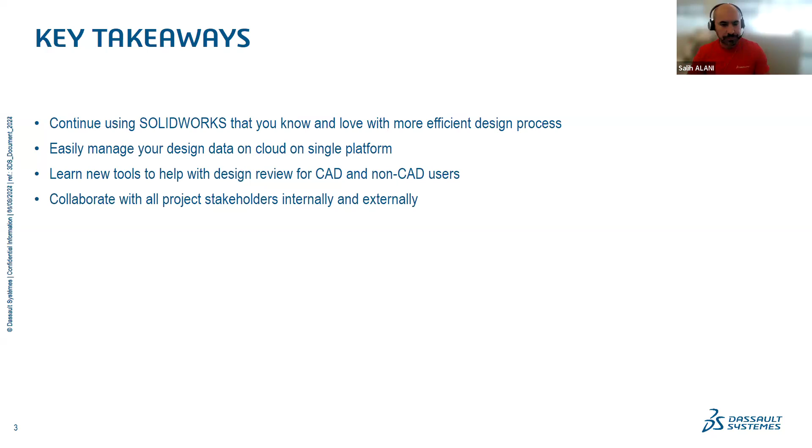So I would like to start with this: we all know design, we all know CAD. Most of you, whether in school or professionally, know SolidWorks and how to use it. But the main challenge with developing a product is not only the CAD itself. There are so many different things that cause challenges when you're working on a product design. The first thing, in my view and from the market surveys we get from people we work with, is the lack of collaboration on CAD design.

If I ask everyone here today, when you design a 3D model, the first thing you do is give it a very specific, meaningful name and put it on your desktop. Then when you're looking for it: did I put it in folder A, folder B? Did I put it on Google Drive? Is this the last version? Did I create a new one? This causes a lot of confusion when you collaborate with people and designers. You're always looking for something and you don't even remember where you put it.

So lack of collaboration is always going to be a big hurdle for every engineer. Of course, there are many different tools today, and the platform tries to give you a one-stop shop and a single source of truth for everything you need to do as a company, whether you're a designer, in marketing, or in a different department in the organization.

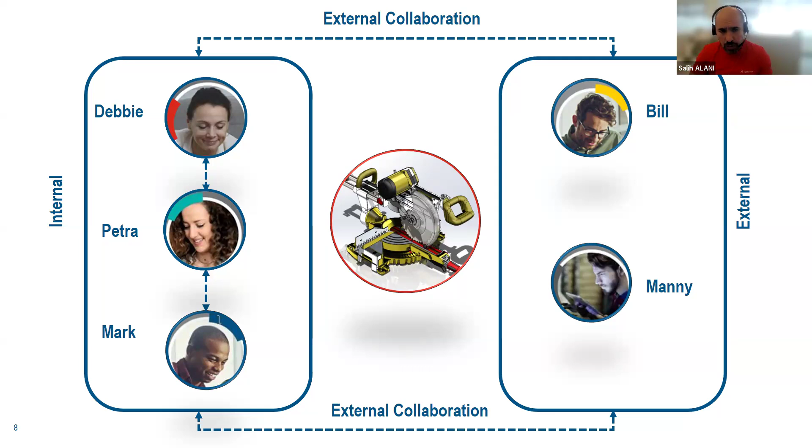So first things first, when it comes to 3D Experience SolidWorks, the beauty of it is the simplified or quick onboarding. Today, if I'm the admin of the company, all I need to do, I know that Debbie is a designer here, I can assign the 3D Experience SolidWorks role. Then she can install it directly from the platform, and she can start working.

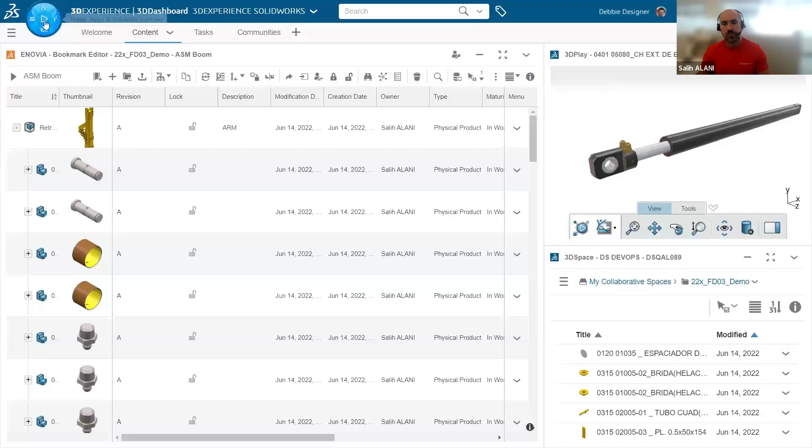In addition to that, from the platform, you have access to all the basic information, like learning how to use the platform and how to use SolidWorks. And you can also ask questions directly from there by using the communities. So this is a quick example. Debbie, for example, goes to the Compass. She can access what we call the Welcome app, which gives you everything in there. By simply opening the Welcome app, you will see the entire information.

You have the Learning Center. You have a quick welcome tour that you can navigate through to understand what the platform is and most of the things you need to do in order to start your work. After that, you can just simply click on install, and that installs SolidWorks directly on your machine. It's a very simple installation. If you guys have run the install before on desktop, when you use this one you will see how simplified this experience is today.

So once SolidWorks is installed, you can just simply click on the open button, and you will open the SolidWorks session. One thing I would like to note, you can open it from the platform, but at the same time, there will be a shortcut on your desktop where you can actually run 3D Experience SolidWorks or the SolidWorks connected application on your machine. So first, I explained here how you start by installing the product.

Now, the next step is, now you have SolidWorks, you need to start saving your data. Today, in the majority of workflows, you save your stuff locally. But when you save stuff locally, it's not available for everyone in your organization. With the platform, you can start working on your design. You can have everything locally, but as soon as you're ready, you can push and save your data to the cloud so everyone will be able to access it. So inside SolidWorks, on the left-hand side, there is something called the FeatureManager Design Tree, which I think most of you are familiar with.

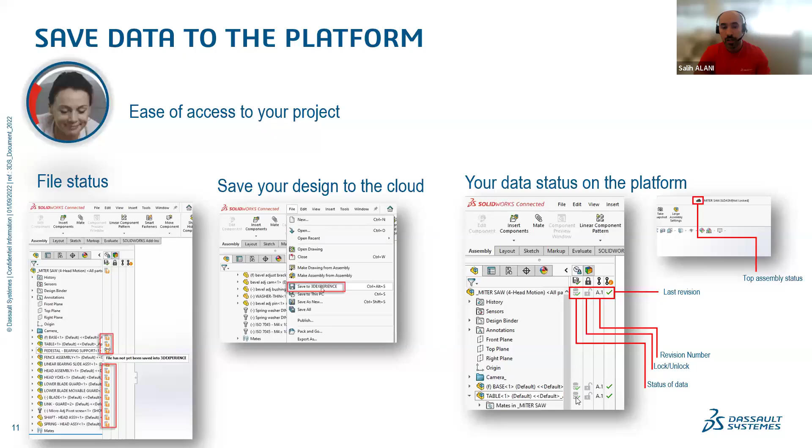I have my project locally today on my machine. I can open SolidWorks. As soon as SolidWorks opens, I can start using SolidWorks exactly the same way I use it today, the familiar way. I can see from that window, as I showed, the status of the file. You can see here, everything is not saved yet to the 3D Experience platform. Everything is still local to my machine. I have something called My Session, and we're going to be using this a lot. My Session is the panel where you can see the status of your content on the platform.

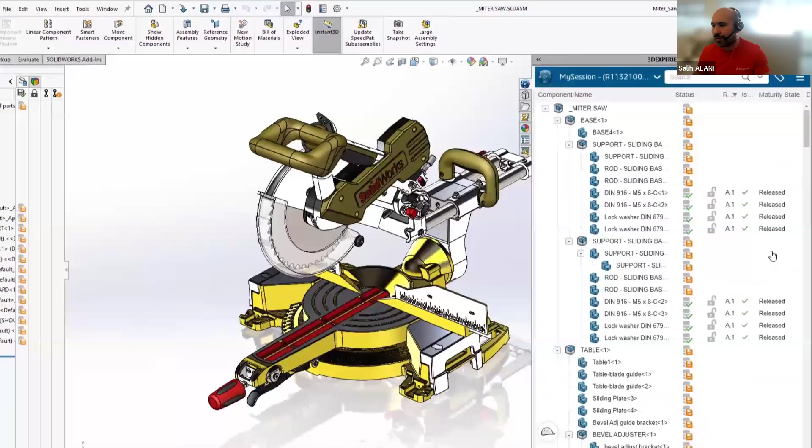And a Toolbox component is always going to be released, because a Toolbox component is usually something that you do not modify. It's available for you to use in your product. Now I understand what is going on with the model. This is the starting point. Now I can start making some changes to the design before I save it to the platform.

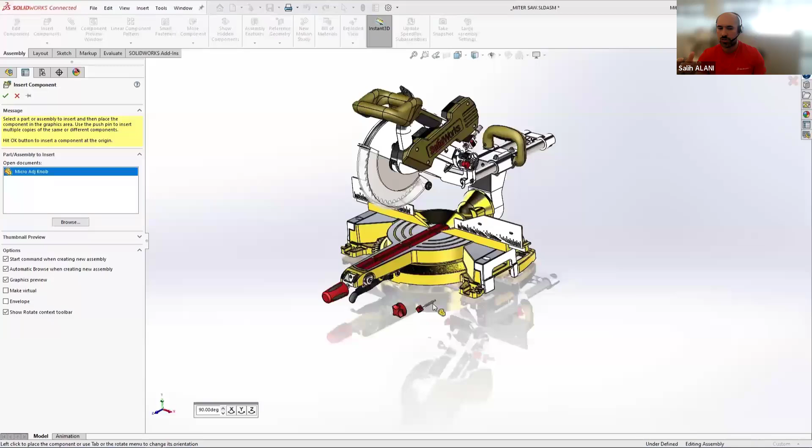So in this case, there are some missing components or parts in my design. There is the knob of the miter saw, and there is also the pin. So a few simple operations here, just doing some mate operations in this workflow to complete my design. And after my design is complete and ready to go, I can go ahead and push my design to the 3D Experience platform.

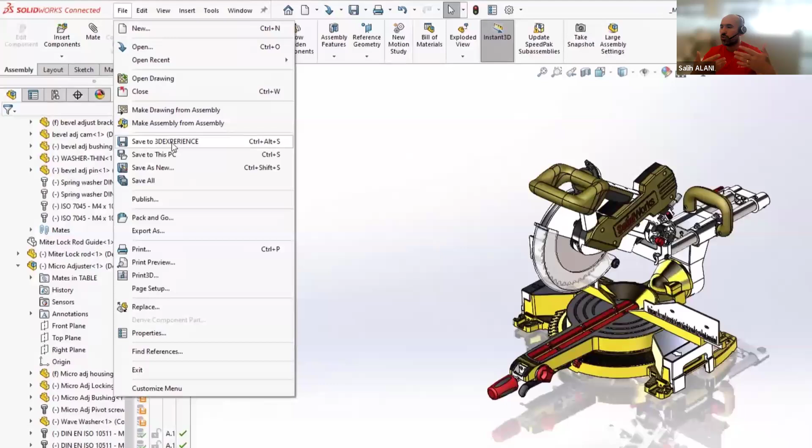Why? So I can first make it available on the cloud and also make it available for everyone. So you can see here, I can click on save to the 3D Experience platform. Once that's completed, your data is available on the cloud so everyone else can start using it. Once it's saved, you can see on the left-hand side, it went from the orange floppy disk icon to green, because right now my data is synced to the platform and everyone can access it.

After that, Debbie the designer, let's say, started uploading everything to the platform. Now, if there is some modification, how does it start? It starts with a task from your design lead. So let's say in this case, Petra is the design lead. She started by doing task assignments to the design engineers.

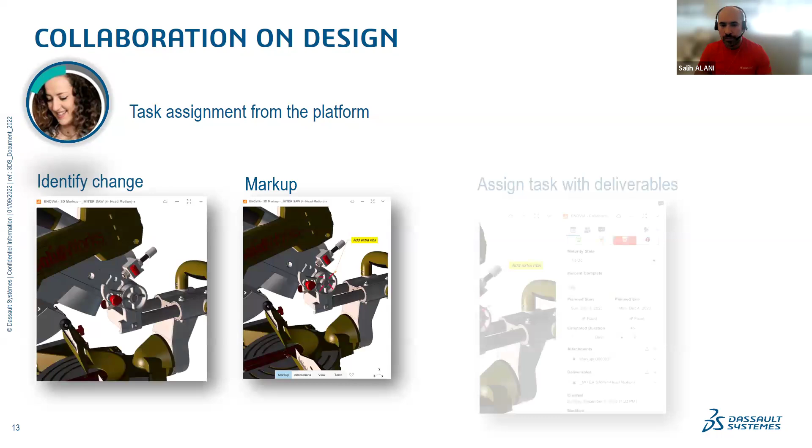From the platform, she can identify and inspect the model first and see what exactly is going on with it. She can start doing some markup to mark the area where the changes are needed. And she can start opening a task and then edit and provide that task to the designer so they can start their work.

So let's say Petra, the manager, is on the road today. She has no access to SolidWorks, but guess what? That's the beauty of the platform. She has access to a tablet. She doesn't need to do any specific design, but she can lead the people and give assignments to them. She can open the model because it's on the cloud, and she can use the tool called 3D Markup.

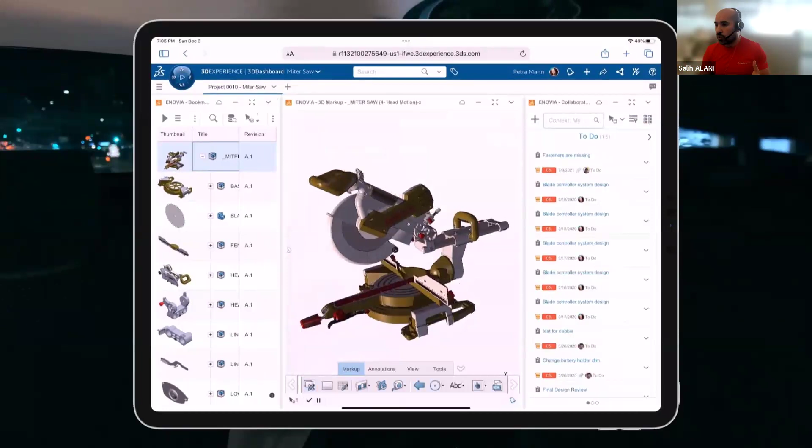In 3D Markup, she can start adding all the necessary modifications or changes to the product. She highlighted that extra ribs need to be added on that component to strengthen this area. So here she explained that extra ribs need to be added, and then she can start a task. A task is an assignment to the engineer to explain what needs to be done. She can assign the user, and then she can add the markup she created in here.

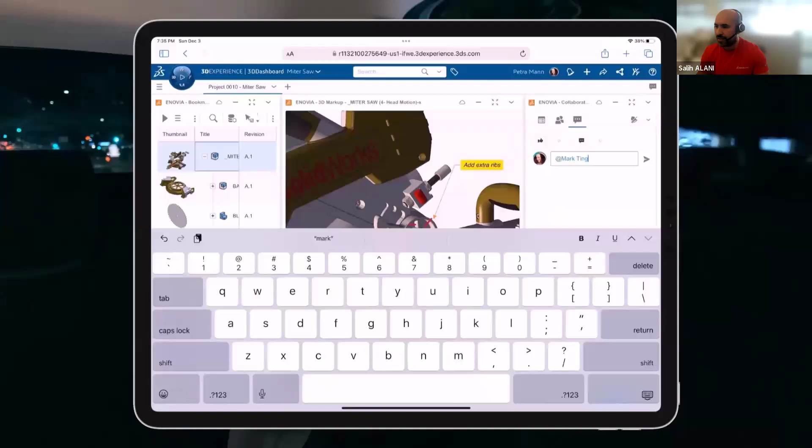And here's the other beauty. In addition to that, she can bring the design into the task. So the user, you will see in the next step, doesn't need to go and look for anything locally. He's going to go from the task and bring the design back to his SolidWorks application to continue the work. So now Petra did this and assigned the task. Now the other user will be able to see a notification and start the work.

One thing I would like to mention here: although I specifically said 3D Experience SolidWorks is available on the cloud, it's also available in offline mode. Today on desktop, you can use SolidWorks whether you are online or offline. But 3D Experience SolidWorks, since it's connected to the platform, runs with the internet. But we also gave the ability, if there is no internet and you know you're going to travel, like today you came to Alexandria for the user group, and while you're traveling you need to work offline, to take the license offline and continue working offline.

So what do you do first? Before you take the license offline, if you're going to do some work on the design, you need to lock the component or the file you're going to be working on so no one else can touch it. Because if you keep it unlocked, someone can modify it. You need to make sure the file is locked to you so no one else can change it.

And that's another important piece of information I would like to mention. When you work in a local or file-based system, and you both work on the same file, you're going to overwrite each other's work because you have no ability to lock it. Now here on the platform, you can lock it and continue working. If someone else wants to use the same component, they cannot modify it, but they can create a different version or revision to continue working on.

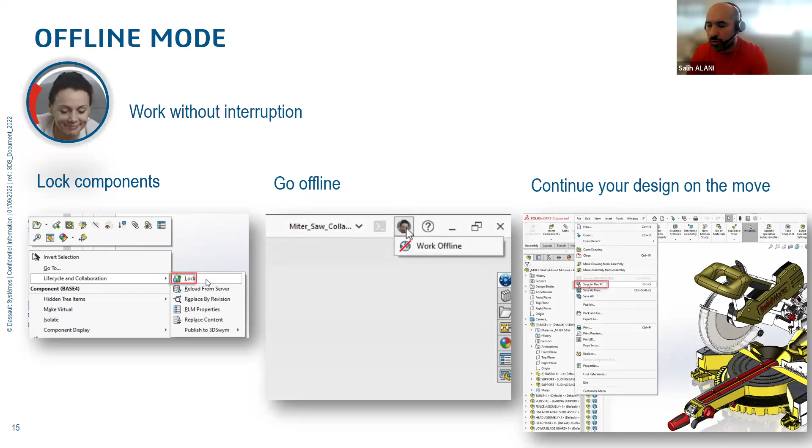So you lock the component first, and then you take the license offline. As soon as you take the license offline, you can continue working and saving your information locally. And once you get back online, you will be able to sync your changes to the 3D Experience platform.

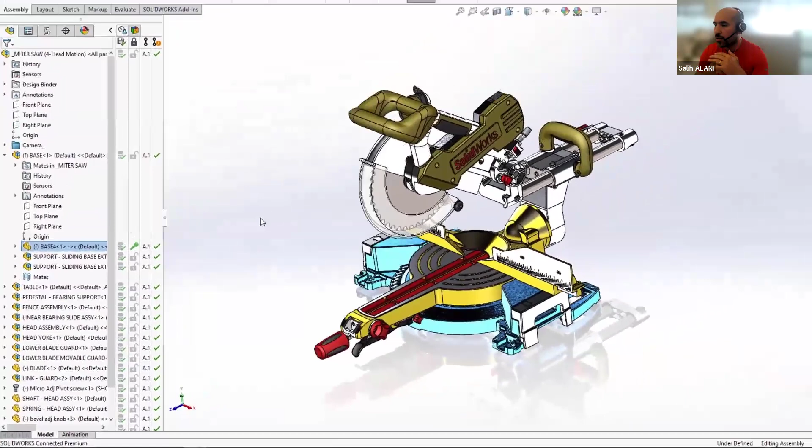So Debbie, at this point, she knows she's going to go on a trip. And before she goes on a trip, she knows that she's going to be working on that specific component in the design. What she does first, she goes and locks the file so no one else can access it and make changes. And you can see here in the tree, it gives you like that key symbol. That means it's locked for her own use.

After that's done, she got all the information that she needs. She locked it. She can go and take the license offline. Right now, to take the license offline, you have from 1 to 30 days maximum. In this case, Debbie knows that she's going to go for 15 days, so she takes it for about 2 weeks.

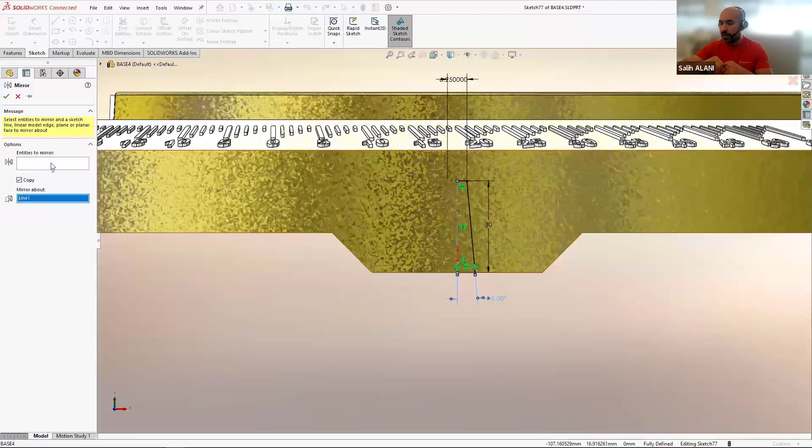In this case, if you remember what she did, she locked that component. And now she's going to make some edits to that base, and she's going to change the number of stops, because this is a miter saw that actually turns left and turns like 360 degrees, and she can modify how many stops you can add to this base. Simple operation, cut here, and she can pattern that, and now her work is basically done.

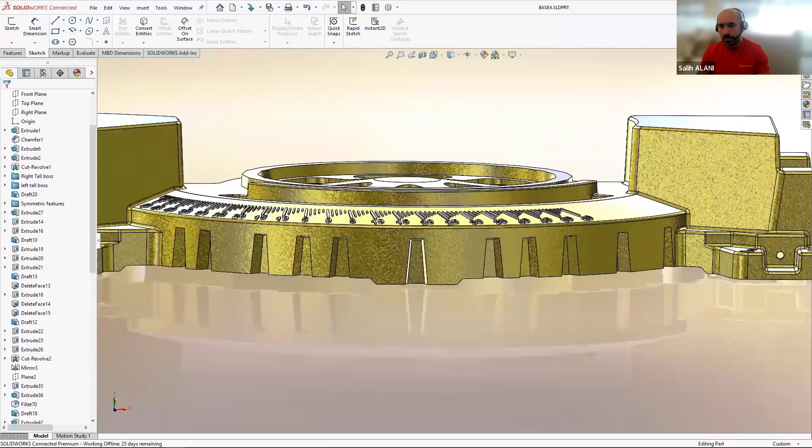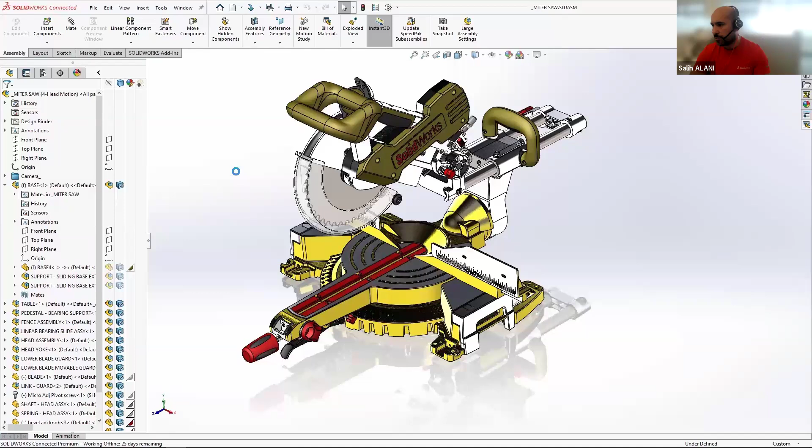What she's going to do right now, she's going to save everything locally, right? Because she's still offline, so she can save locally. So now that is done, the assembly is also updating. She can go and save the entire assembly on the local machine. So after that, the change is still on her machine, and, as I said, she would be able to sync the changes back to the 3D Experience platform whenever she becomes available.

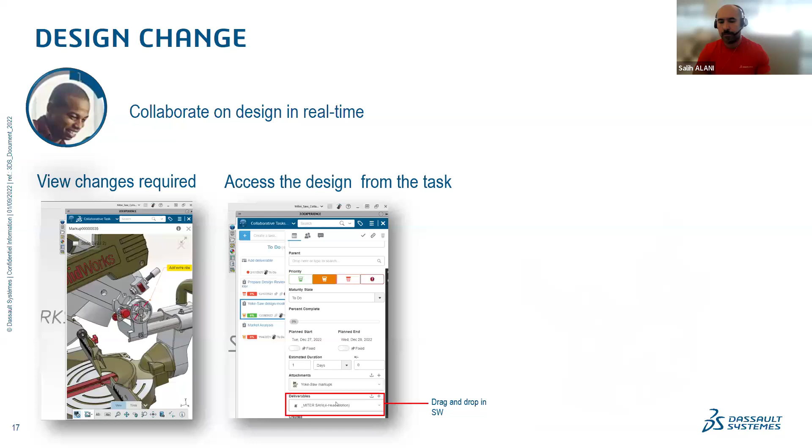Now, Mark is the one who is going to work on the same data, but he's part of the team who works on the design. So he can collaborate in real time. How? If you remember, the manager assigned a task to him, and he's going to be the one who works on that. So what happened? He's going to be opening SolidWorks and see that information. He would be able to see what's in the task, and he can get access to the data by taking the data from the task into SolidWorks and start the work. He can make the changes, and he can push the changes back to the 3D Experience platform.

So what can he see? Not only the design, he can see some important information. He can see, for example, that this file is locked. And who locked it? It's Debbie the designer, so he cannot make any changes. Also, when he saves the data back to the 3D Experience platform, he would be able to override, that is, save on top of it, or he can create a new revision that is separate from the first one. So let's see this.

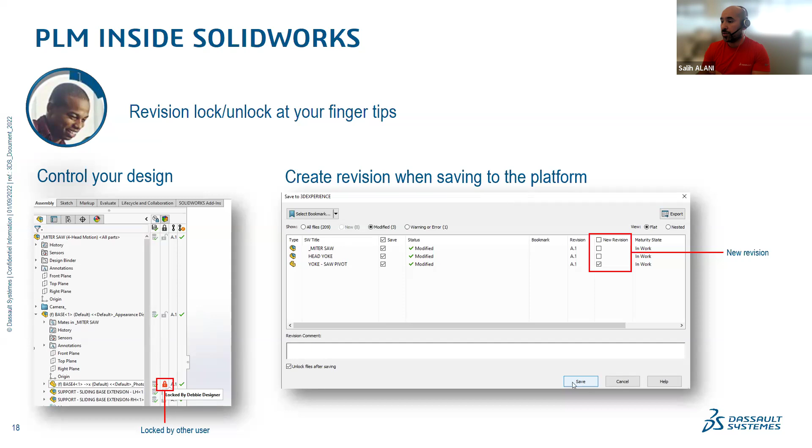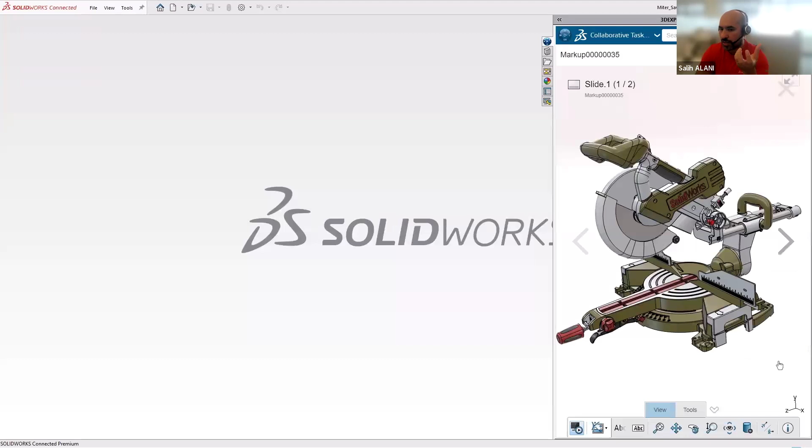Mark goes to the 3D Experience platform. He has access from his session to the task. He can see a task from Petra explaining to him what he needs to do. He can go to the comment section and see the information that is addressed to him. He can also see the level of urgency here. He can view the markup to understand what he needs to do. So here he can see that there is an extra rib that needs to be added to this component.

Now, what's the next step? He needs to get access to the model. From the task, he can drag and drop the assembly inside SolidWorks and start making changes. He needs to keep the manager updated, so he can explain to the manager, Petra, that he will start the work. Since the task is right now in what we call the to-do list, he can move the task to in work so he can notify the manager that he started the work.

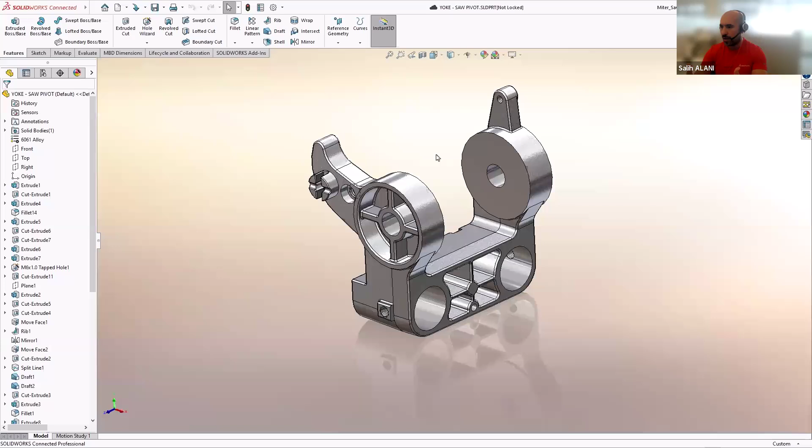So she knows that someone is working, is not like fooling around, right? So now what he's going to do, he's going to be working on a component here. First thing he's going to notice is that this component cannot be touched because Debbie took that file before she went offline. So he's going to be working on another component. See, this is the beauty. Debbie works on something else, he works on the other, so they can all collaborate to make that final design.

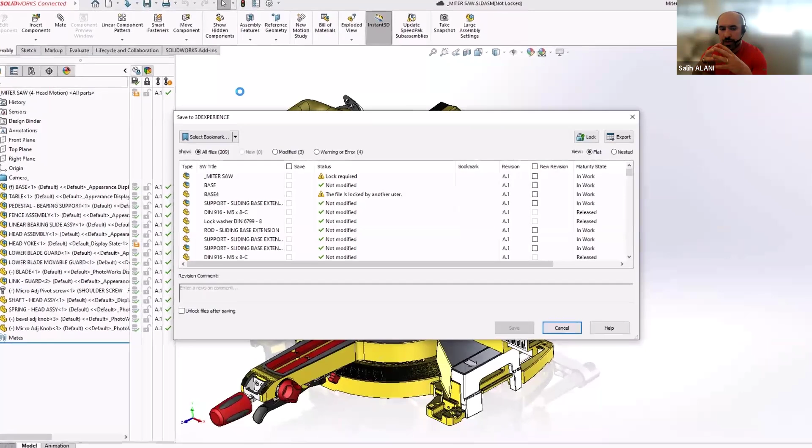He's going to make the changes based on what Petra explained, which is add an extra rib. He just made the changes. What he can do right now, he can save everything back again to the platform so everyone else can see the changes. Notice that when he's going to save the file, he will be presented with an option of what he needs to do. He can either save over the model, but he can also check this option to create a new revision, so it does not override the previous changes.

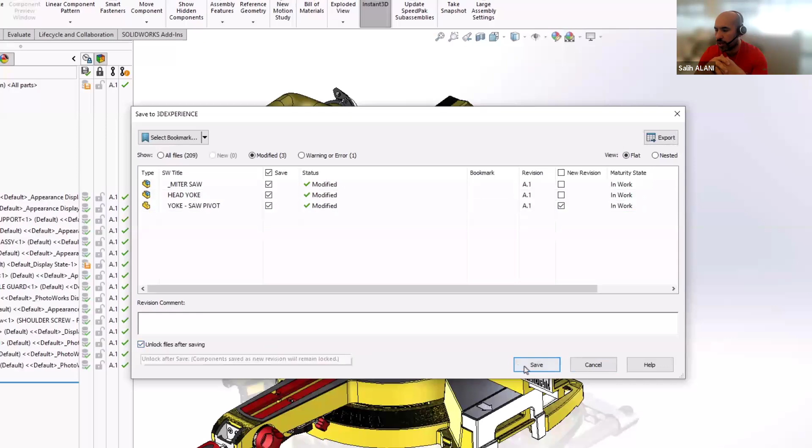First things first, he's going to have to lock, because you cannot save to the platform before locking the model. So he can lock it, and optionally, he can check this option. Once the data is saved, he can release the lock from the file. So now he finished making the change and saved the data back to the platform. Since he completed the task, he can simply move that task to the completed section, and that means his work is done.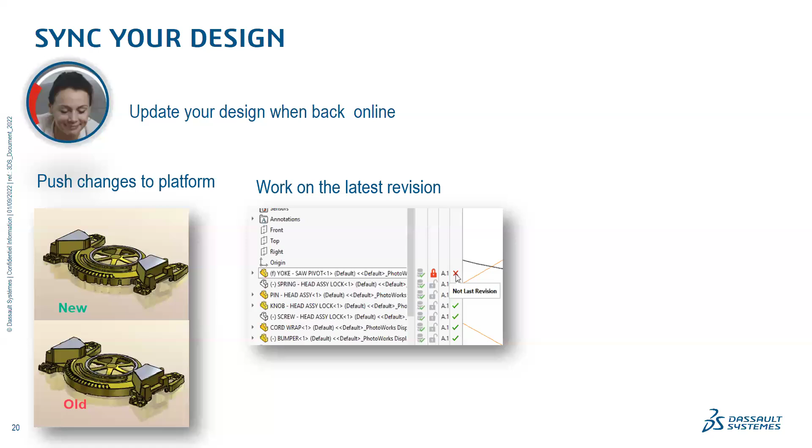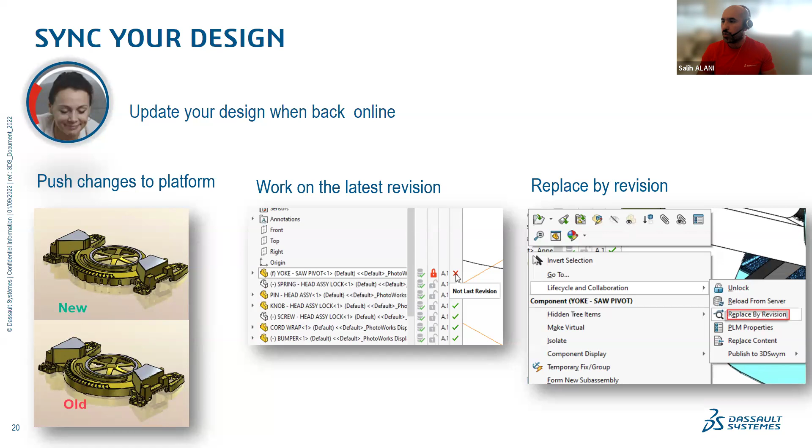She can see if there is a previous revision that was there, so she can actually switch it back. And also she can replace the revision that she has on the local machine with the version that Mark created on the platform. So let's see this. First, she needs to go back online. She can go to the same button, click to bring the license online, because she wants to sync her data back to the 3DEXPERIENCE platform.

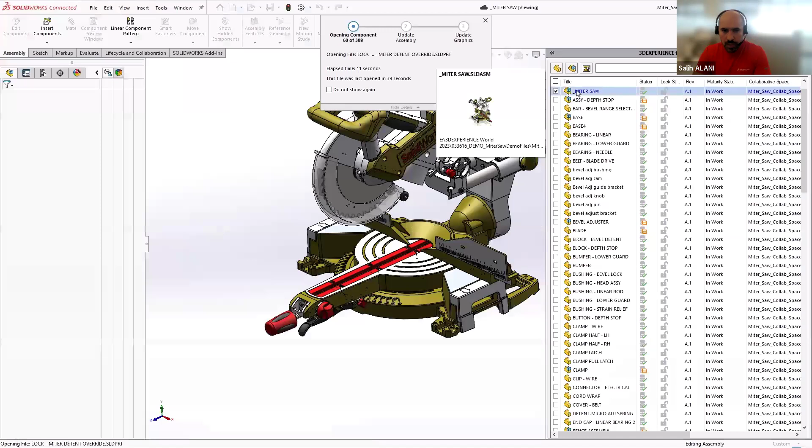So she can open the model, which is the main assembly here. As soon as she opens the model, she can see what changes happened ever since she went offline, right? She can click on that model and see that this model is not in the latest revision, and it's also locked by Mark. If she wants the same revision on her end, she can simply go to replace by revision. She clicks on it and sees there are only 2 revisions available, the existing one and the new one. Click on that option, and the component is replaced with the new revision.

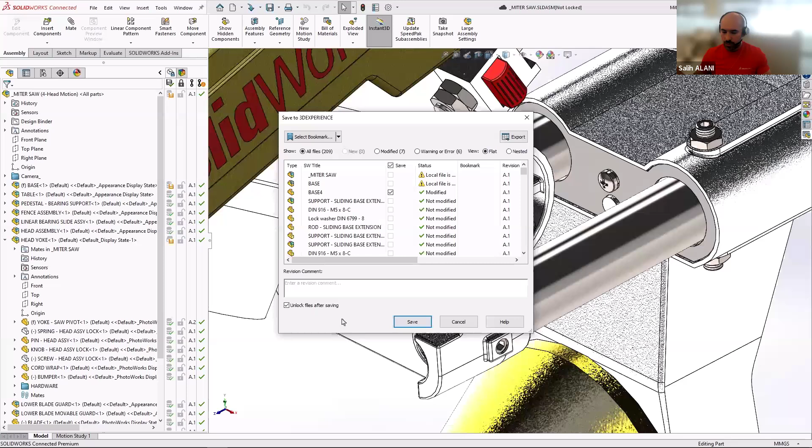And now she can save the design back to the platform. So as you can see here, we always have the ability to push the changes to the platform so everyone has access to the latest and greatest data on the platform. Okay, let's move on.

When you share your design within SolidWorks, there is a process. Let's say you want to share your design directly from SolidWorks. There is a concept we talked about: in 2023, for July, we released something called Share and Markup. This capability allows you to share your design outside of your network, for people who just want to review it and provide feedback without making any edit. The person who receives the data does not need access to SolidWorks, does not need to be part of your platform, but would be able to provide you feedback to improve your design.

So what do you do first? Before you send the data for review, you need to mature the status of the model from in-work to something else. You're going to see it's going to be to freeze, so you can freeze the design so no one makes changes to it.

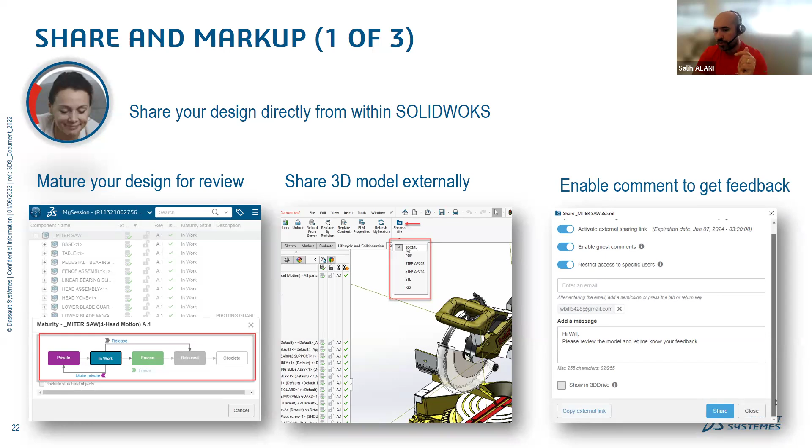Then inside SolidWorks, there's an option called Share a File, where you can actually share a copy of that file with a specific file format that only allows the user to preview the model and make some markup that helps the designer to make changes. When you do that share, you would be able to enter an email address of the person, add a message, and then you share the file with that user.

So let's see how this works. The recipient receives the file. He can open the file in any device. In this case, I'm using my mobile phone. This is simply the mobile phone I have. I would be able to open the email, and I can get to the model, because all that's going to be available to me is a link that I can open, log in with my 3D Experience ID, and I would be able to access the model and provide feedback to the designer.

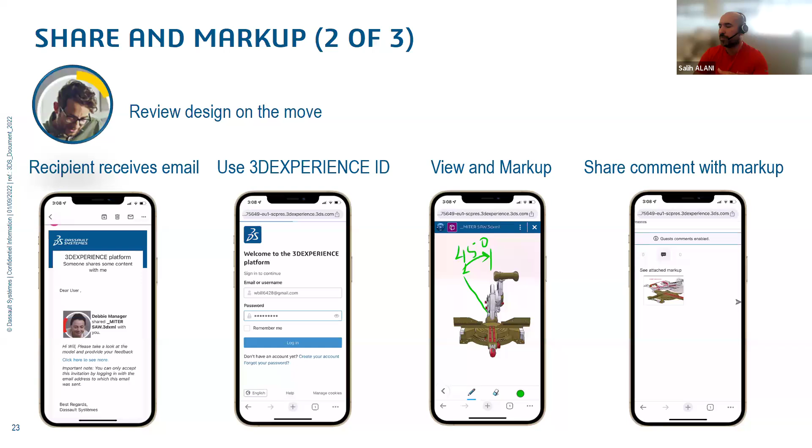I can simply interrogate the file. I can rotate it, I can do some measurement, and I can do some markup. And I can send a comment along with the markup to the designer. What happens to the designer? The designer receives a notification inside SolidWorks. They can click on the notification, and it opens that markup or the model inside SolidWorks, and they can see the information in there and make the necessary changes. In this case, they need to add another component that's missing from the design.

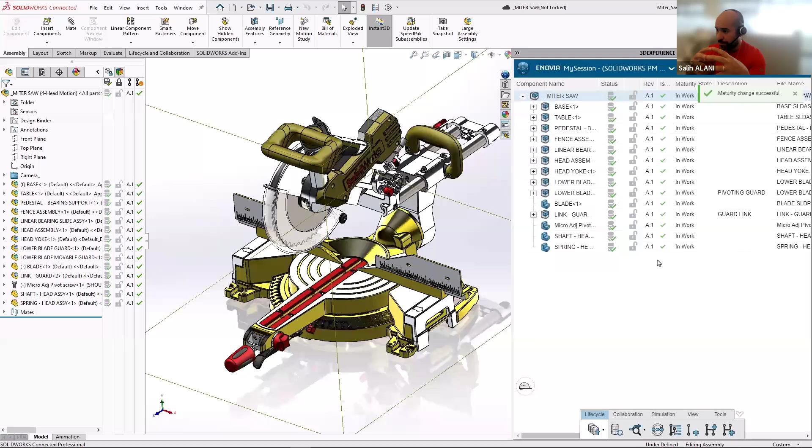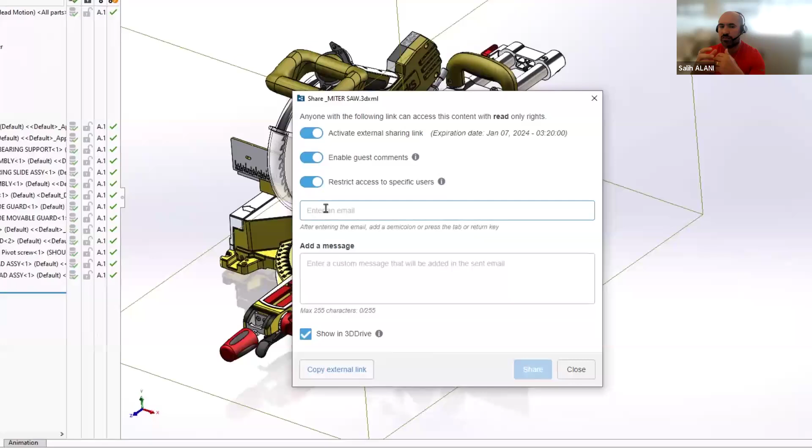So let's see how this works. So from my session, Debbie can click on the maturity and can freeze the design. Why do we freeze it? Because we want to make sure no one makes any modification and changes the design. After the design is in frozen state, I can click on Share a File. In this case, I'm sharing this file not for someone to edit it or make changes. I'm sharing it for someone who can just review it and provide feedback. You can see here, I can put the email address. I can explain and ask the user what they need to do.

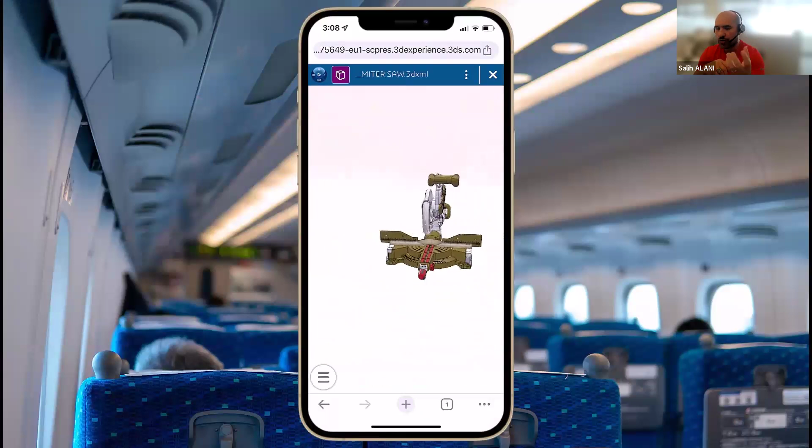So Bill here receives a notification while he's on the road. He would be able to open that notification on his mobile phone. He can log in with his credentials or 3D Experience ID, and you would be able to see the same model as inside SolidWorks, but this is a lightweight version of the model where you can actually rotate the model and understand things. You can explode it, you can section it, you can get more detail without having to have any software. It's just a simple login. You get access to the 3D model on the browser, on your mobile phone, and any device that you have on the road.

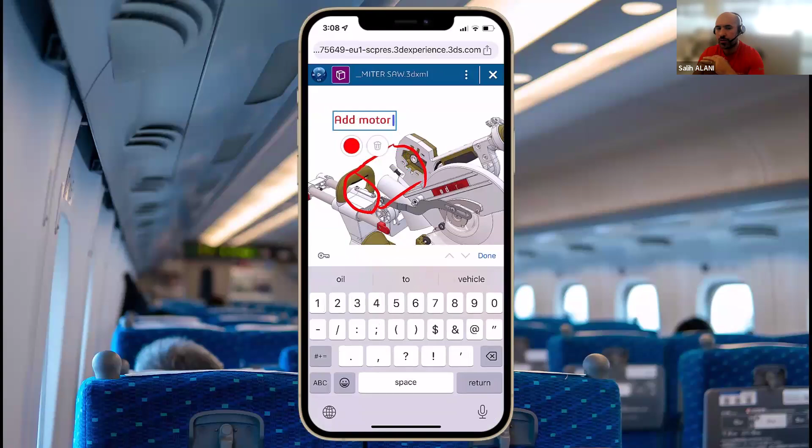So here, explain to the designer what needs to change, like this miter saw needs to have a different angle when you cut with it. And also, you notice that there is a big component missing in here. So he can use the tools available to him with 3D Play to annotate or leave some comment on what is needed here. So in this case, he explained that a motor needs to be added in here. Once this is done, he would be able to share not only that annotation, but he can also leave a comment of what needs to be changed. In this case, say, just see the attached markup for my feedback.

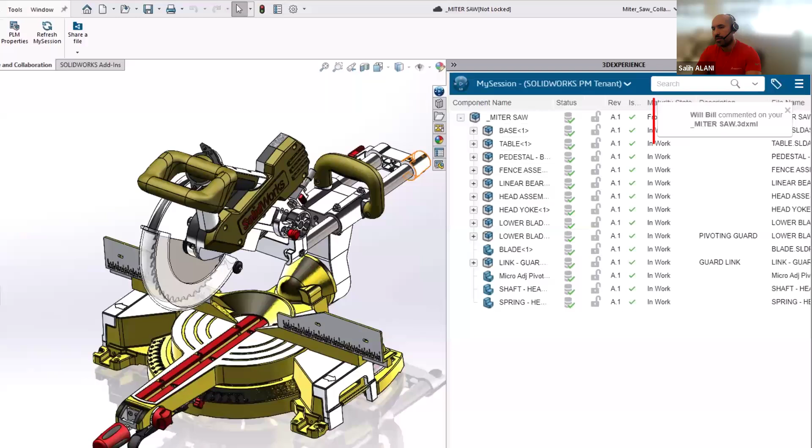So once he clicks on that submit button, Debbie the designer will get a notification inside SolidWorks that she can click on to see the comment from Bill. And she can open that comment inside the SolidWorks task pane. And you can see here, as soon as she clicks on the comment, she can see the information that needs to change. But she can also cycle through every single annotation. So she can understand that not only does a motor need to be added, but also some alignment or changes need to happen here.

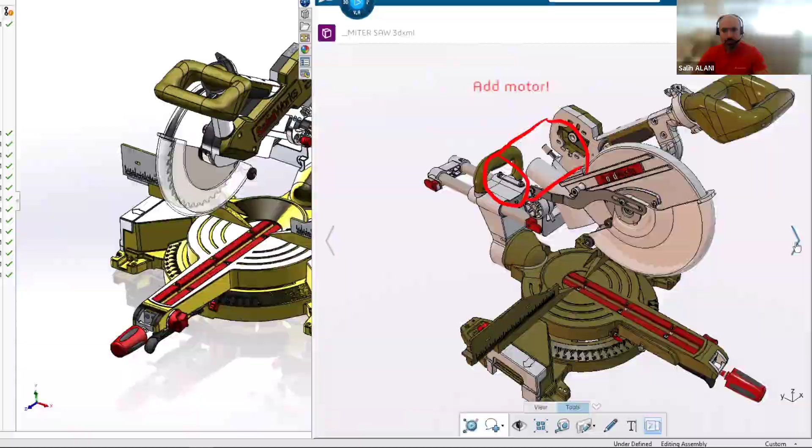There's another thing that maybe not everyone uses today, but it's important to highlight. So let's say that I'm working in 3D Experience SolidWorks, but I have a contractor who's going to take my design and make modifications to it outside of the platform. So we need to make sure that even people on the desktop have the opportunity to work with someone on 3D Experience SolidWorks. And this is what we call collaborate with supplier with SolidWorks desktop user.

There is a specific workflow that we built inside 3D Experience SolidWorks to close that loop between the SolidWorks desktop user and 3D Experience SolidWorks. So what are you going to do in this process? The SolidWorks user from the platform would be able to select the data they want to share. They can export the data as a package. If you guys are familiar with Pack and Go, this is something similar, but this package maintains all the PLM information that comes from the platform.

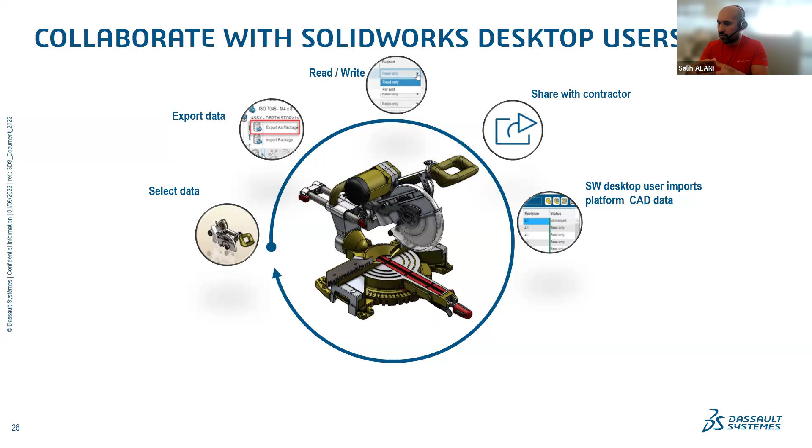You can specify if you want to give read or edit access to the data, and then you can share with the contractor. The contractor, who is on SolidWorks desktop, would be able to import the data and make changes and edit it. And then after that, he can send it back to the platform user so they can incorporate the changes. And this is how you sync the design back.

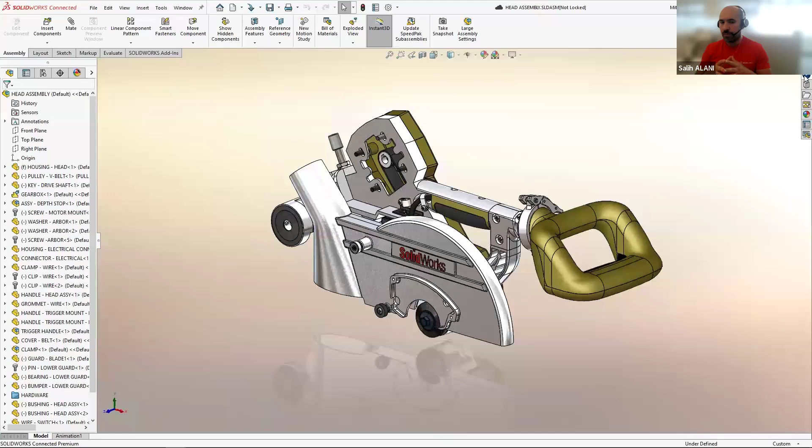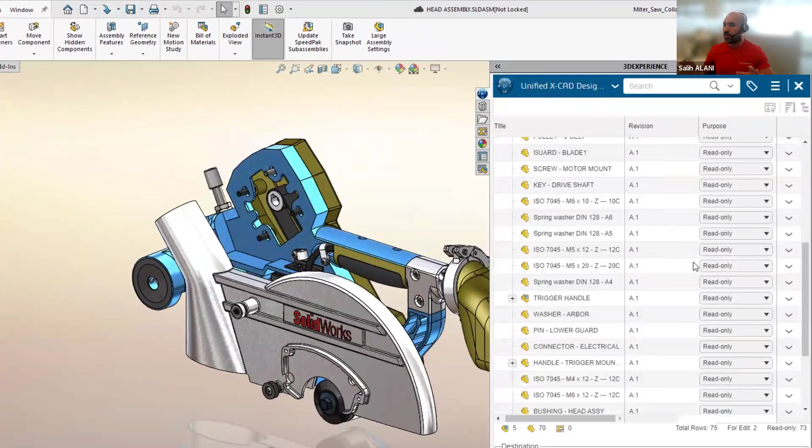So here we can see Debbie is going to go to this subassembly component. She can go to the tool. There's an option called import or export. In this case, she wants to export this component as a package. She will be presented with an option where she can select which components specifically require an edit from the contractor, and everything else that doesn't need to be changed, she can keep as read-only. So there is a big level of security we provide to the user to control what needs to be edited and what needs to be just read-only.

So now I can specify where I need to save the data. In this case, I'm going to save it to the local disk as a package. Okay. And I can export it, and I can give a name to this package. In this case, it's going to be the head assembly, and then I can initiate the export. Okay. So what happens? The SolidWorks desktop user receives this package. They can use this exchange package. If you need more information, let me know.

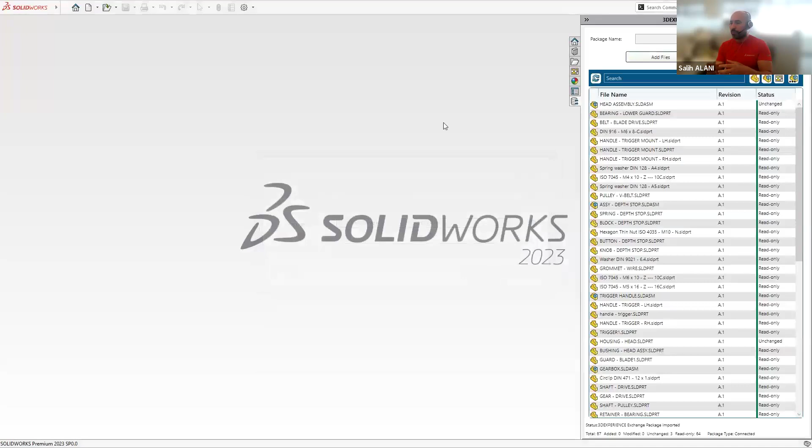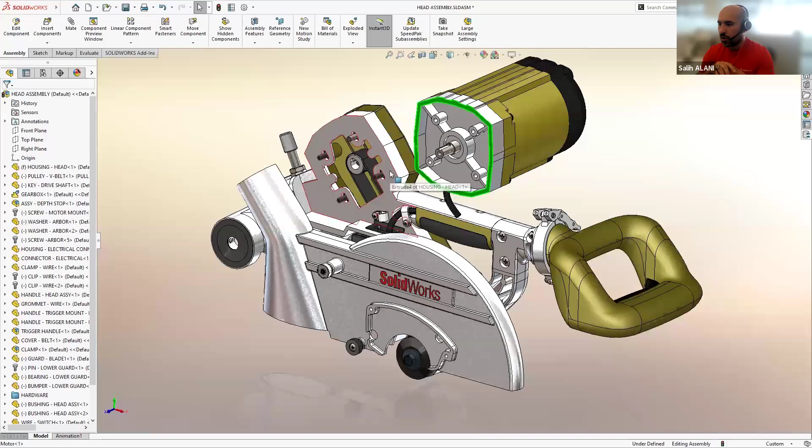This is an add-in that we added for the SolidWorks desktop user, where you can import the package that comes from the platform. So the user on desktop is going to be able to see the metadata of the platform to know what they can edit. In this case, they would be able to insert the missing component. If you remember, there is a big motor missing. The desktop user can go ahead and make the necessary changes to insert and mate the motor, and then after that they would be able to package everything back and send it to the 3D Experience platform user.

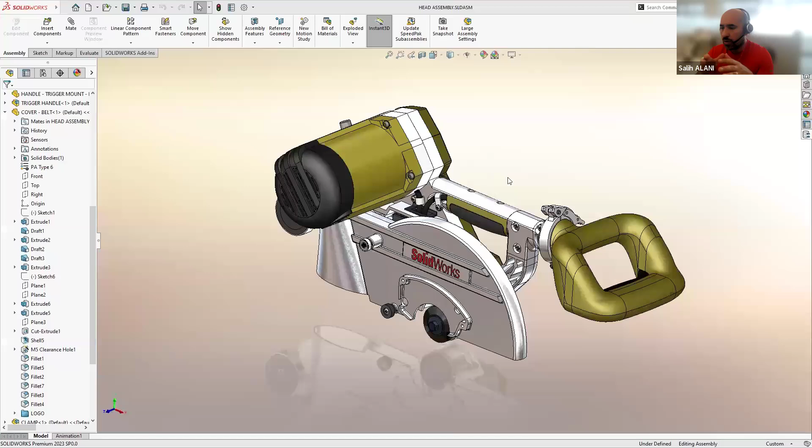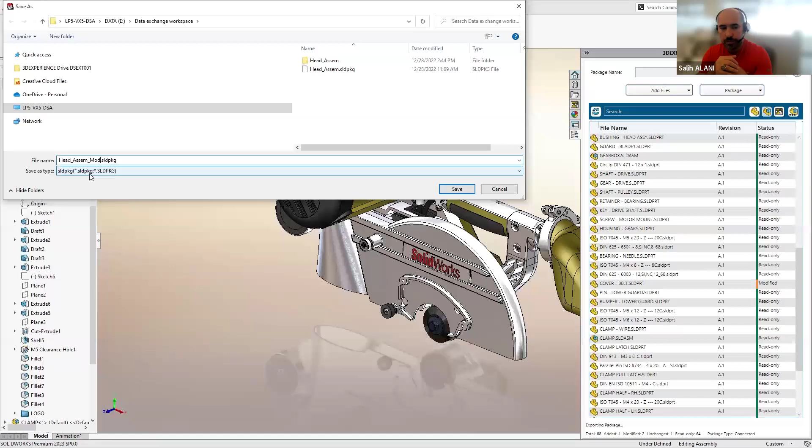Okay, now all the necessary edits are done. We can see that every component they made modifications to is identified here inside the panel. Now he's going to export the data back and share it with the 3D Experience platform user. So now he's going to identify that this is a modified package. The 3D Experience platform user takes that modified package that has the changes incorporated from the SolidWorks desktop user. He can simply include the package here and open it inside SolidWorks.

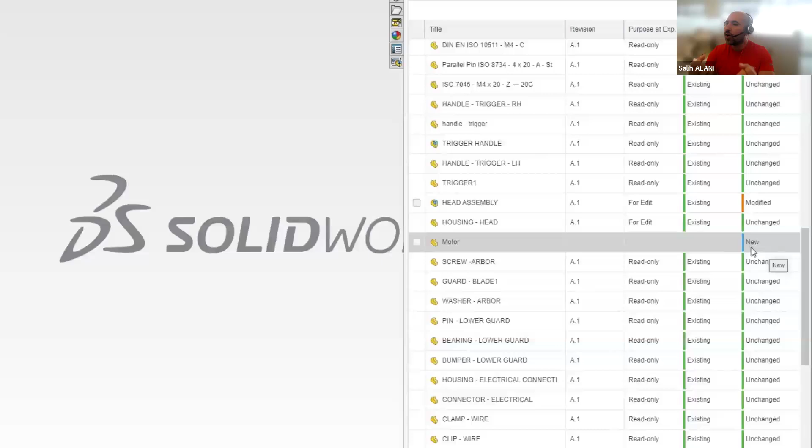And now this is the most important part. After the change happened, I would be able to push the changes that came from the desktop back to the 3D Experience platform and maintain all the revisions and the metadata that's available on the platform. So here you can see which components got modified. So before they upload or save into the platform, the user understands what got changed, so they can make an informed decision.

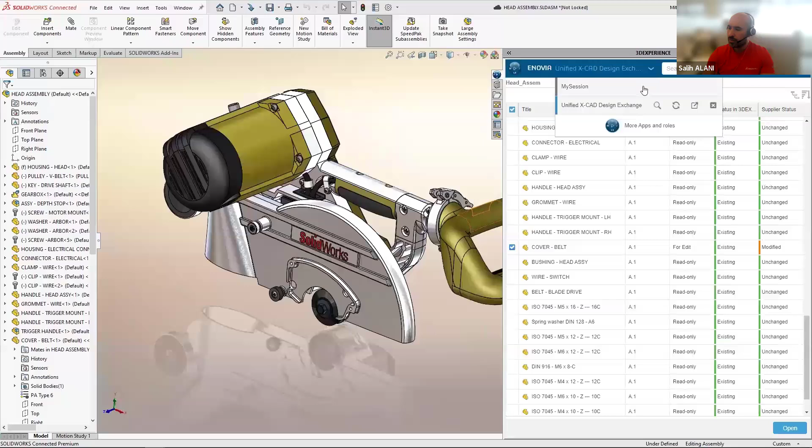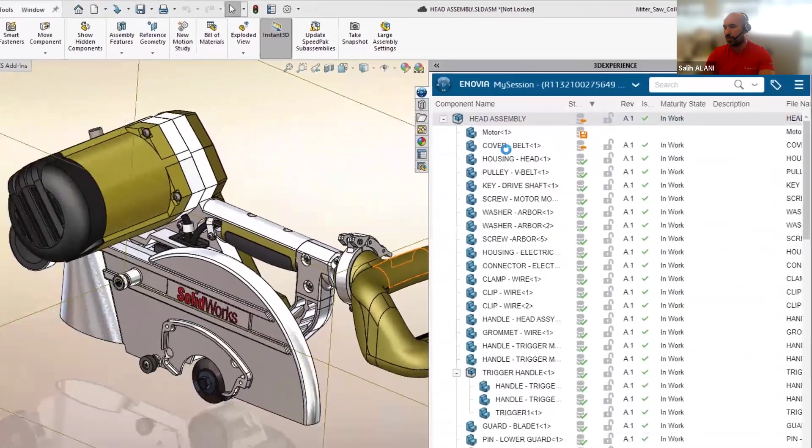So now they open the information inside SolidWorks, and they can go to My Session. The final step in this workflow is to push the data back to the 3D Experience platform. So now they can see this information came from a supplier, imported from a package. The final step would be just to right click on the top level assembly and then save everything back to the 3D Experience platform. Before you save to the platform, you have the option to decide whether you want to save it as a new revision or save over it.

Here, I know the cover belt was modified a little bit, so I would like to create a specific revision. In this case, it's going to be revision 2, and save everything back to the 3D Experience platform. Okay.

Now, in this workflow, we talked about how you start from installation, how you save your data to the platform, how you collaborate internally and externally, and how you can collaborate with a supplier with a desktop application to make changes and incorporate the changes back to the 3DEXPERIENCE platform. What is the final step? We need to create a drawing, because the drawing is the final contract that goes to manufacturing. I call it the release to production.

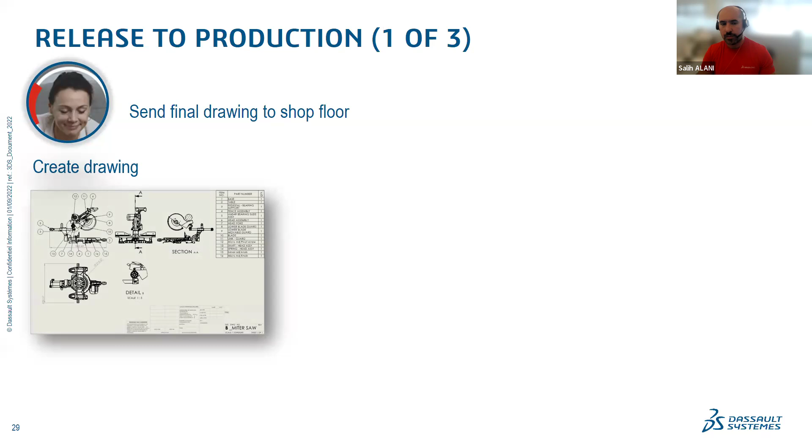So what do you do first? Simply, you create a drawing from the assembly. Then you freeze the drawing; here you can click on freeze to freeze the drawing, and then you set the drawing for approval. There is a process on the 3DEXPERIENCE platform to help the user do a formal approval process, or what we call drawing stamping.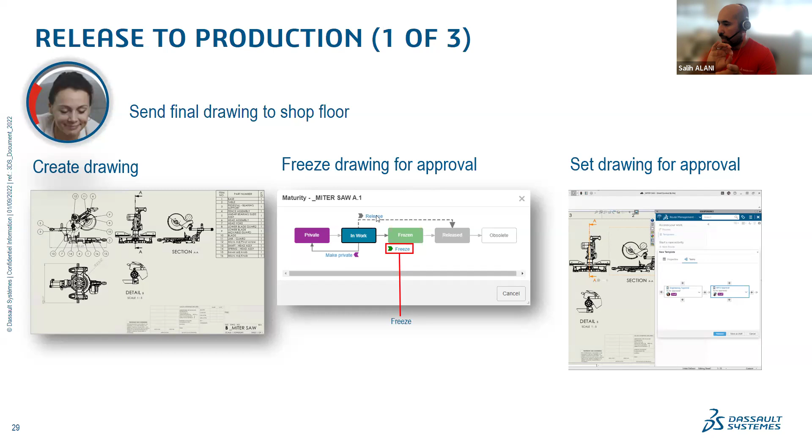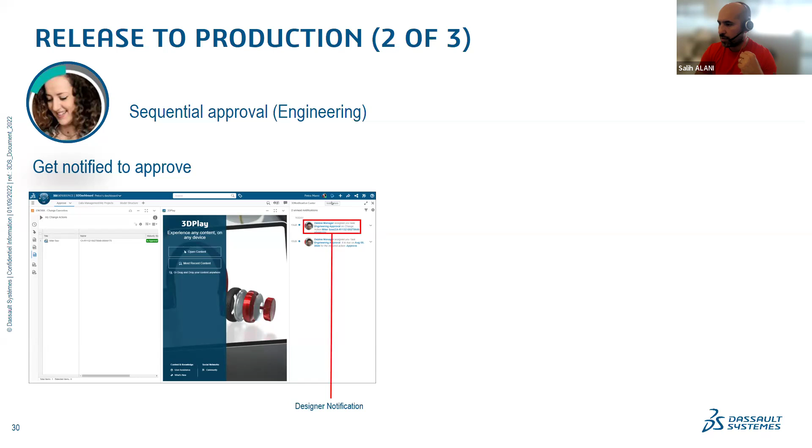You can actually set a sequential approval. The first is supposed to be the engineering approval. Petra, the manager and engineering lead, will have to approve the drawing for engineering. She can see the notification from the designer that there is a request for engineering approval. She can view it and then approve it.

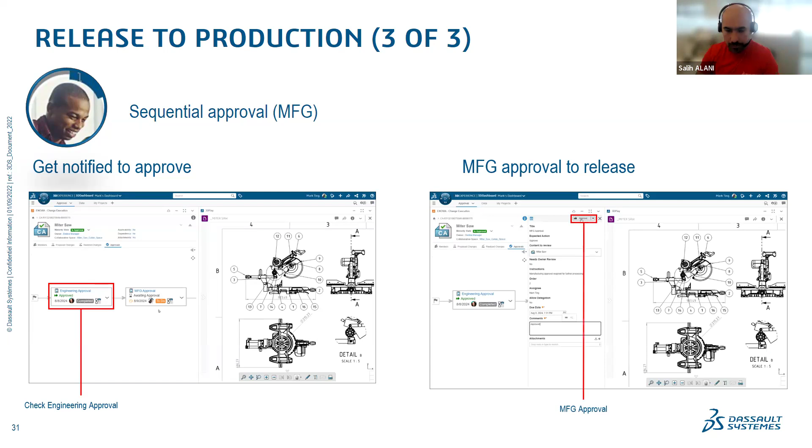After she approves it, it goes to the manufacturing approval. You get notified and can see that engineering approved it first, because if it's not approved by engineering first, manufacturing cannot approve it. Then he can approve it, and that will release the drawing to manufacturing. So let's see how it happens.

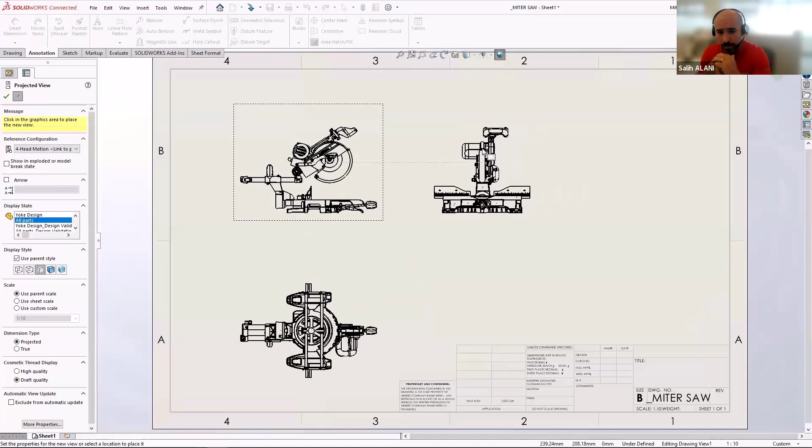Inside SolidWorks, Debbie, the designer, can start creating the drawing. It's a very simple operation. If you're familiar with it, you start with the assembly and put the projected views on the drawing. In this case, I'm putting a top view and a section view if needed. I can also put the bill of materials to show the components included. Now I save the drawing to the 3DEXPERIENCE platform first, because I need to sync it so everyone can access that information.

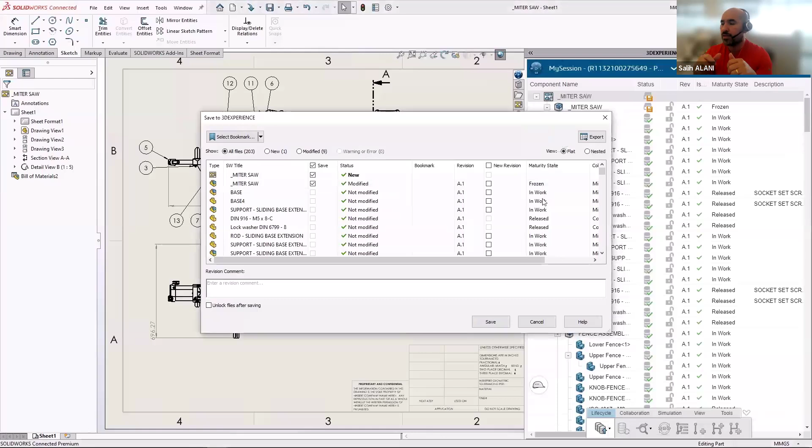After I save the drawing on the 3DEXPERIENCE platform, I can start initiating the release of the drawing to production. I first freeze the drawing so I can start the release process. Now I'm going to create something called a route, because we need to make sure the approval is sequential: engineering, then manufacturing. So here I set this route to be for approval.

I can assign a task to each member in charge of the approval process. The first task is engineering approval. Then I assign the user who's going to do the engineering approval. In this case, Petra Manager is the engineering approver. I apply this.

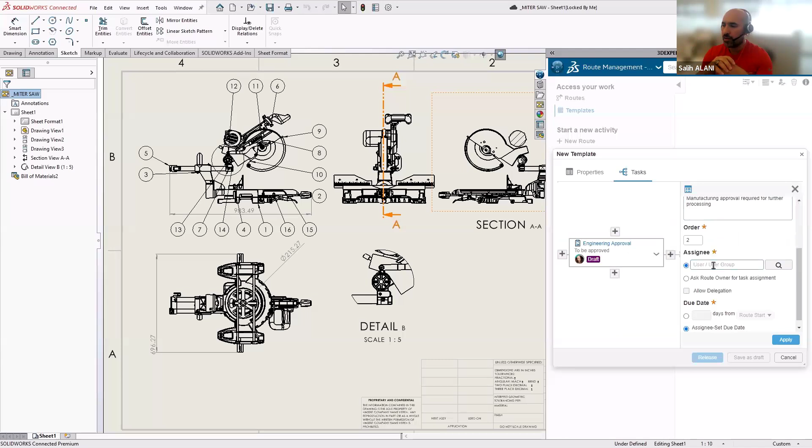The second task is the manufacturing approval. Here I specify the task called manufacturing approval and assign the manufacturing technician who's going to work on this. Mark is going to be the manufacturing approver. I apply it, and then I release the route.

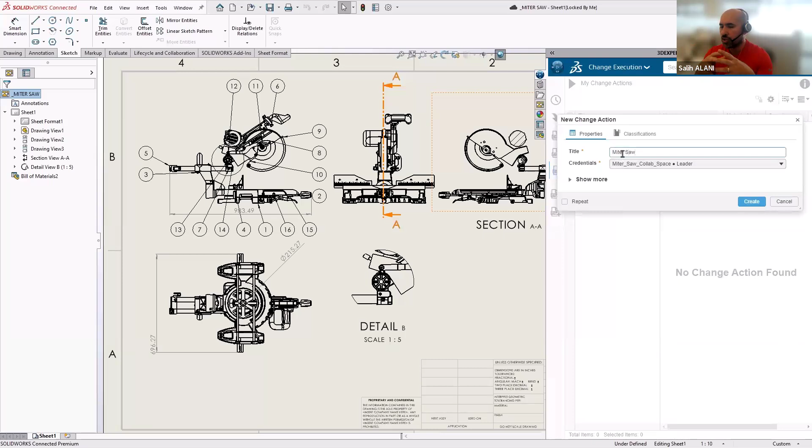After that, there is something called change execution, because we are making a change execution on the drawing release. I can create that change execution, for example, and add to that change action the route I just created. In this case it's the approval route.

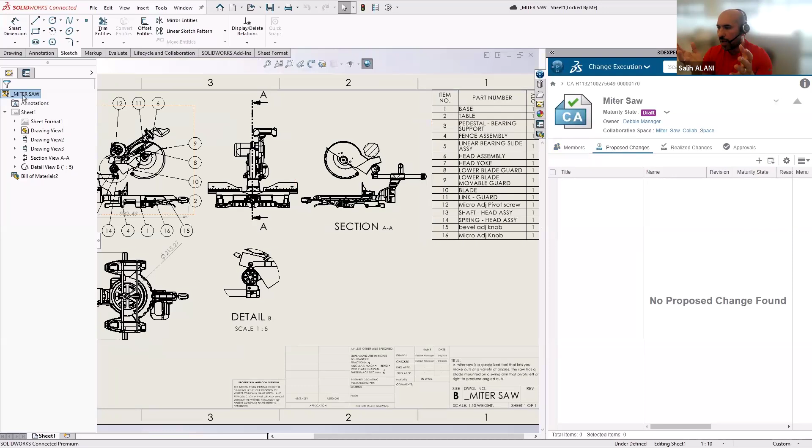The last thing I need to do is include what I'm going to approve, so I drag and drop the drawing inside the proposed change, and then set the route to approval. First I set it to work, and now it's going to go to engineering to approve it, and then manufacturing.

The manager gets a notification. She can drag and drop the drawing inside the 3D Play. She can inspect that everything is okay, there is no problem with the engineering drawing. Then she can go ahead and approve it. Here she can leave a comment saying that the drawing is according to standard, and then she can approve it. That will send another notification to the manufacturer.

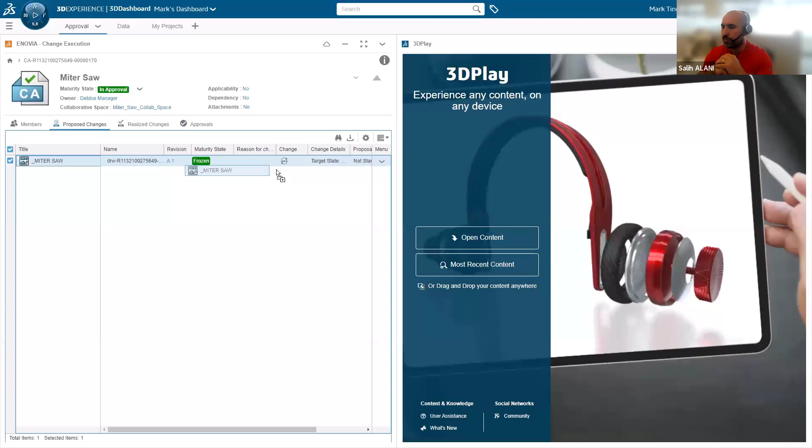The manufacturer can see the engineering approval is done, and he can see on the title block that Petra approved the drawing. Then the final step is what? He's supposed to either reject it or approve it. In this case, he's okay with everything, so he can approve for manufacturing. Once everything is done, that automatically releases the drawing to production.

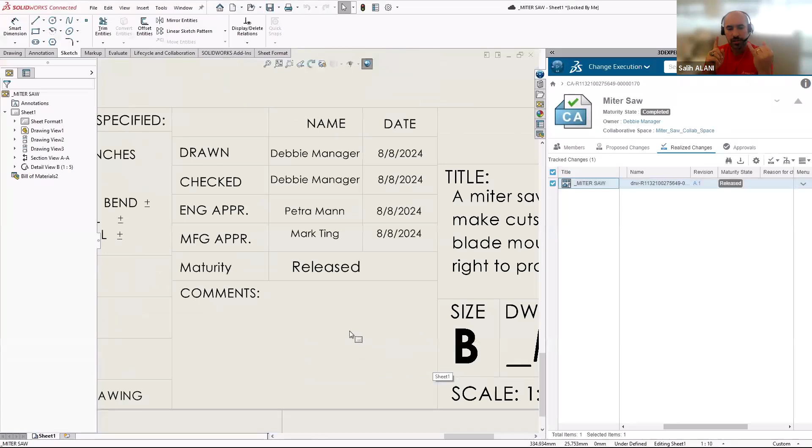So the engineer, you can see here, did not have to do anything. He just sent it for approval, and everything is done in the background. He can see the notification that everything is done. He can open and check that everything is complete, meaning that the drawing is released. And when he opens it inside SolidWorks, he can see that it's released, the engineering approved it, and the manufacturer as well. And that basically goes to production, and they can make that miter saw.

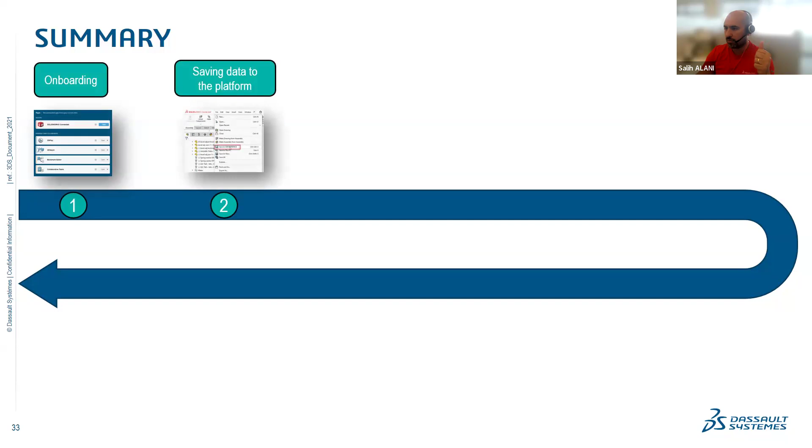I know it's a lot of information here, but I wanted to show you from end to end how 3D Experience SolidWorks helps a company go from designing all the way to production. So in summary, what did I talk about? I talked about the simplified onboarding on the 3D Experience platform, how you can save and sync your data to the 3D Experience platform, how you can use task management to assign tasks to other users.

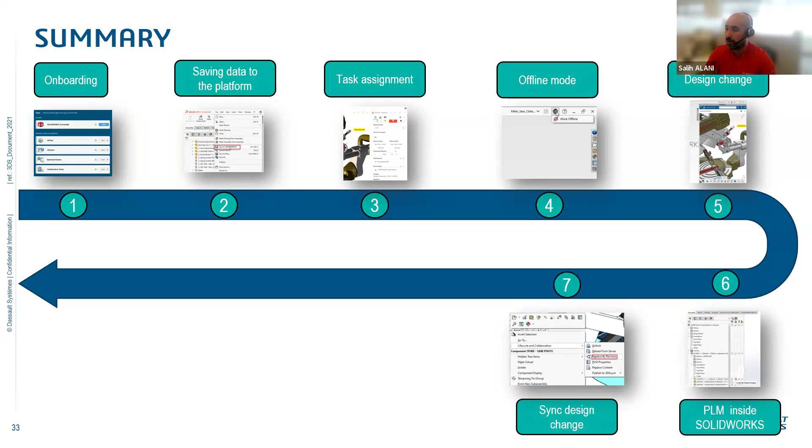You can take the license offline if needed, if you travel, how you can do a design change, and how you can acquire all the PLM or data management insights within SolidWorks, how you can sync your changes back to the 3D Experience platform when you get back online, how you can share your data externally with someone who is not part of your network, doesn't need access to SolidWorks, but they can

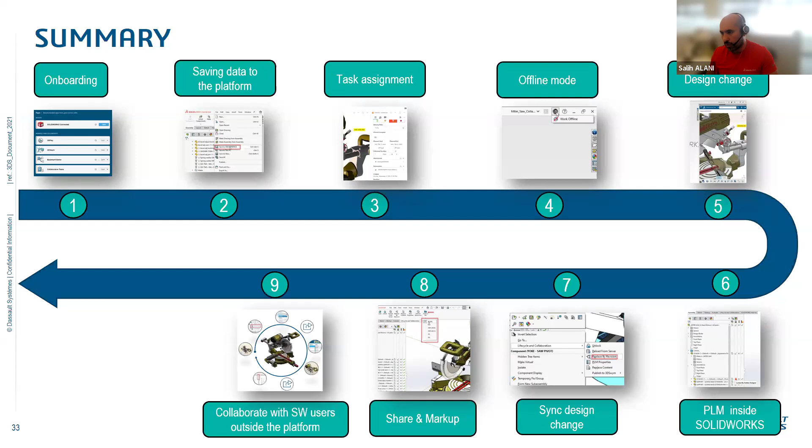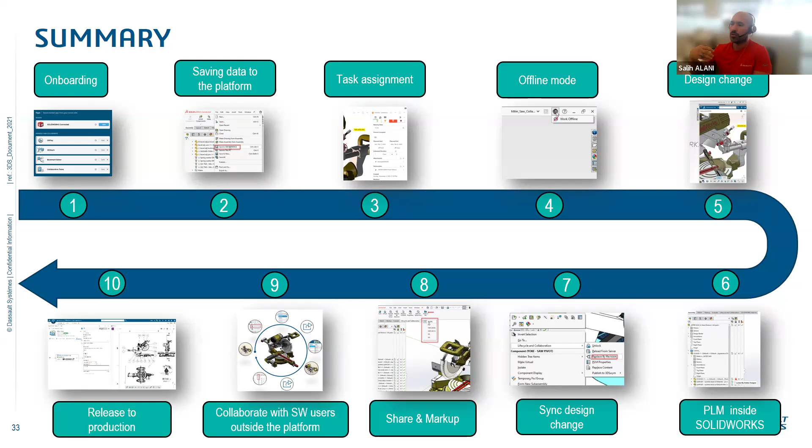provide feedback to help improve your design, how you can do supplier collaboration between 3D Experience SolidWorks and someone who has SolidWorks but is still on desktop and would like to collaborate with a 3D Experience SolidWorks user. And finally, how you can release a product to production using the sequential approval, with managerial approval and the manufacturer releasing the drawing to production. This is all I wanted to talk about today.